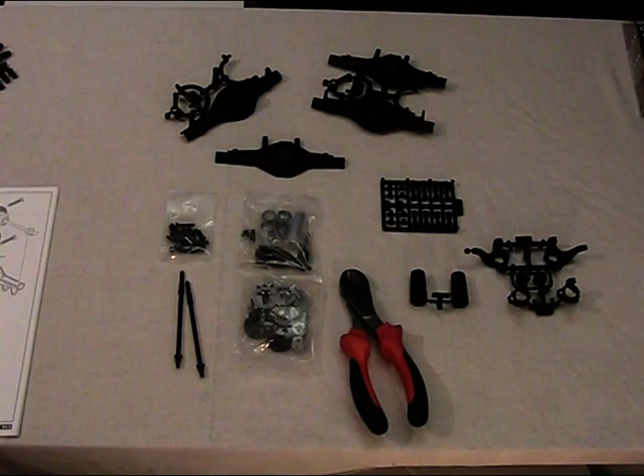Okay, I'll go ahead and remove all the parts and lay them out, and then we'll start assembling part 1. To do steps 1 and 2, I've opened all the relevant bags and put the components from each bag in a separate container.

It's a good idea not to get them mixed up, and also so you don't lose parts or they roll off your workbench. I've laid out all the components we're going to use for these two parts, and you'll see they're listed down this side of the page.

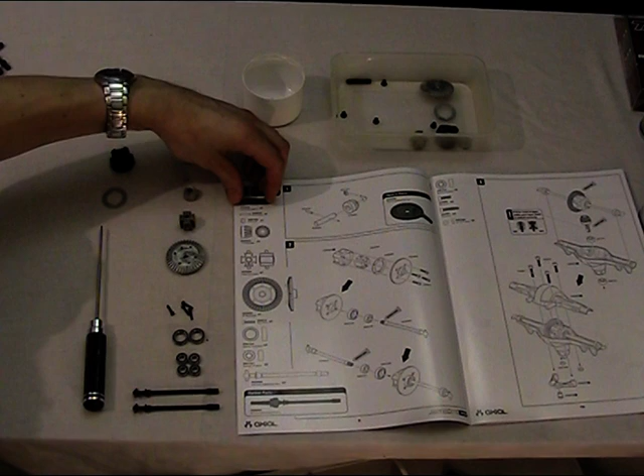The great thing with an Axial manual is that these are all to scale, so if you take the first item, it actually fits on the book. So when you come down to the screws and you've got a whole tub full like this, you can lay them on and see that they are the correct size.

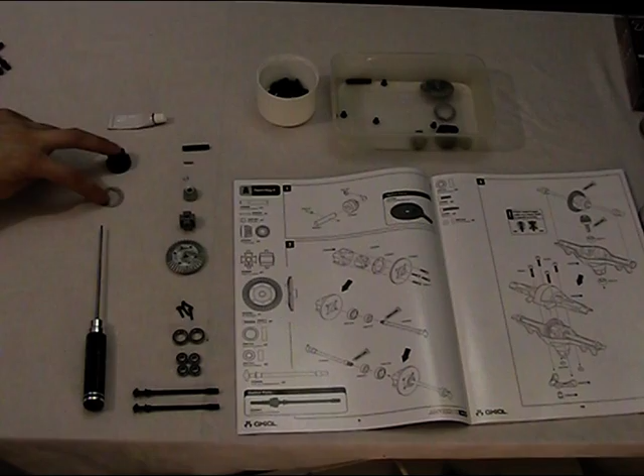That's a great help. Two parts that aren't actually marked are only shown in the pictures, and the part numbers are written on the picture, but they're not on this left hand side.

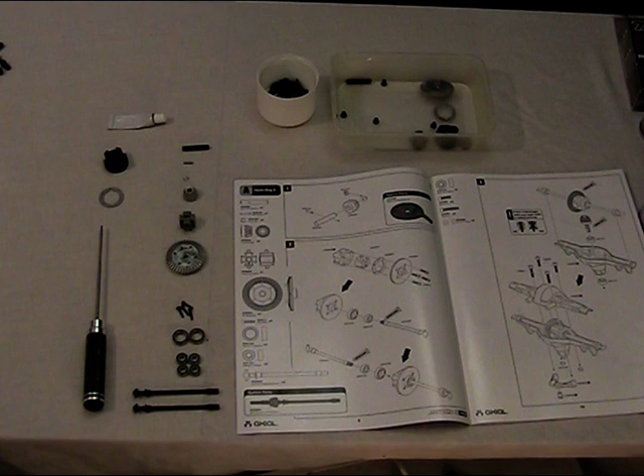Now we just need to set to and construct the parts. You can see here I've laid the 4 components as shown in the diagram. These arrows of direction show you how to assemble it and the process to go through.

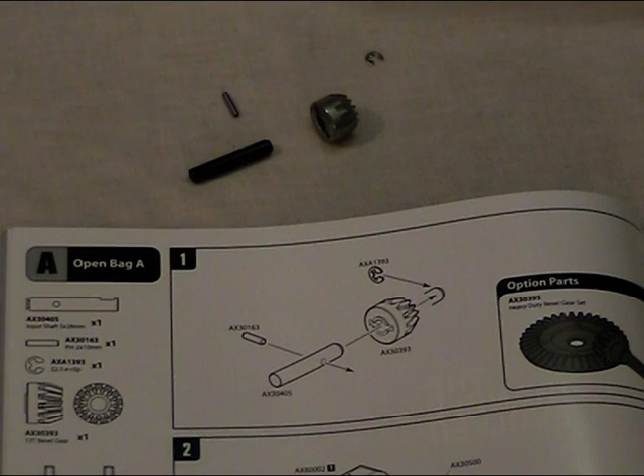You'll note that the end of this is redrawn here, so once you've put that through you'll then put the clip on, which I'll show you how to do.

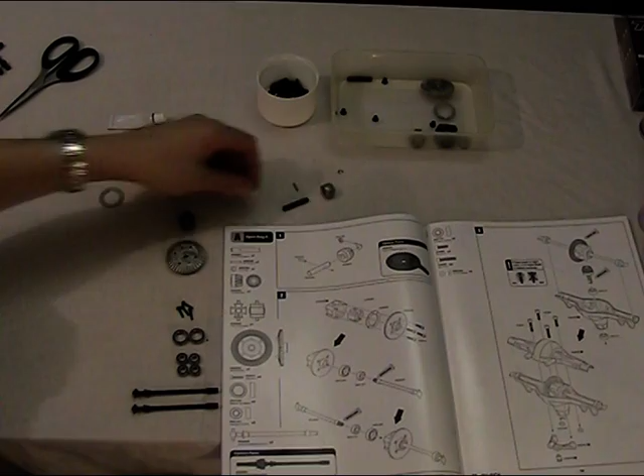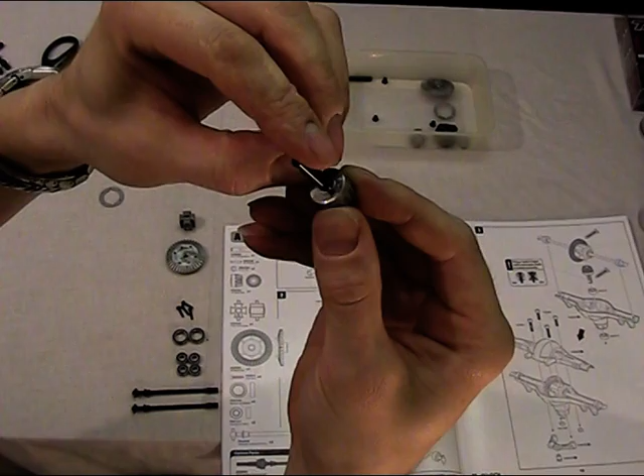So take the main shaft, push the pin through. You can then add the gear and you'll see that the pin will drop into the back, like so. And then we just need to install the clip on the front.

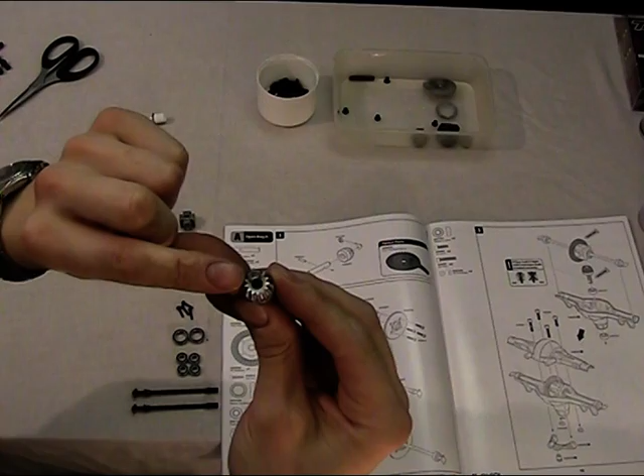These can prove to be quite fiddly, these little C-clips, so I'll try and show you as best I can. You need to get the little open section into the notches. With a pair of pliers, just going to put that clip in, like that.

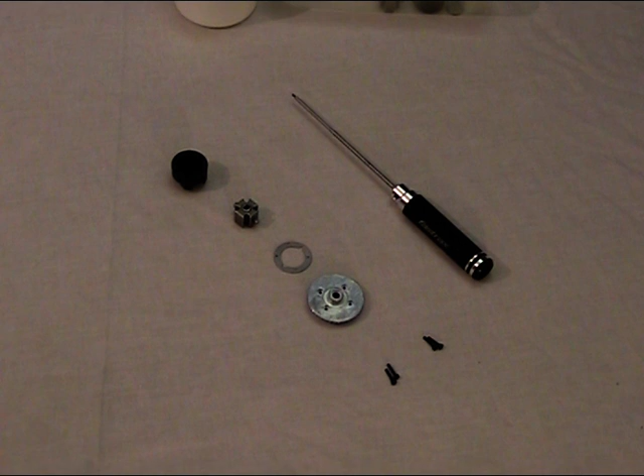You can see here I've laid out the parts that I need for step 2, the first stage, and laid them in order and got my tools ready.

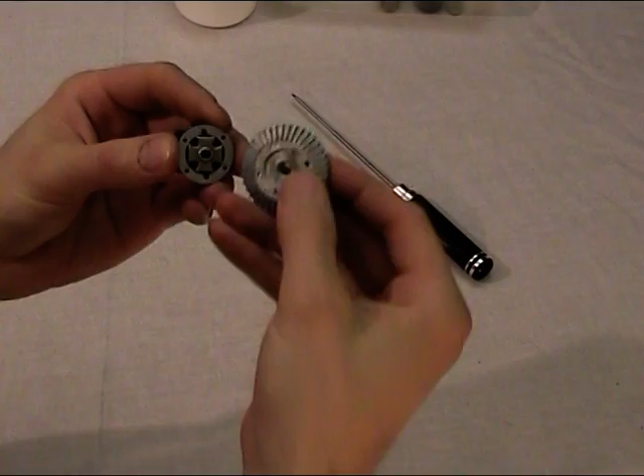So what I need to do is put the heavy duty diff locker in the plastic housing. There's then a small paper washer, just going to go on here, and if you look there's some pins on the back that fit into these holes, like so. And there's simply 4.

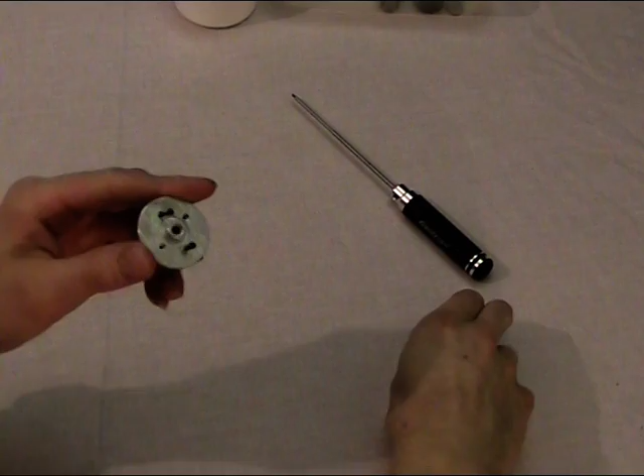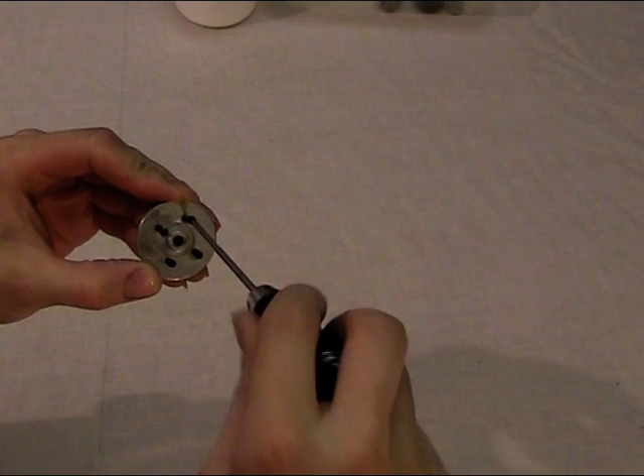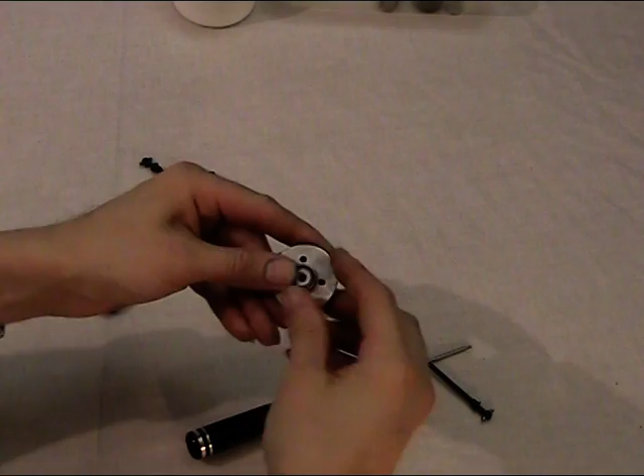I've lightly greased the ends of the dog bones that go into the locker as shown in the manual. So what I need to do now is install the large bearing on either side, and the smaller bearings actually go through the ends, and there.

That one in there. That's then going to drop inside the axle.

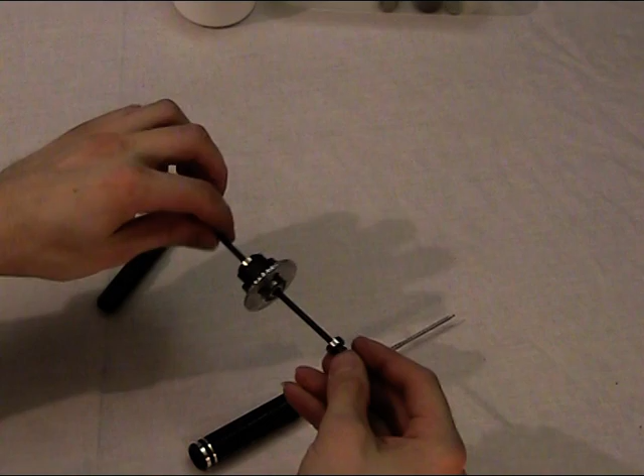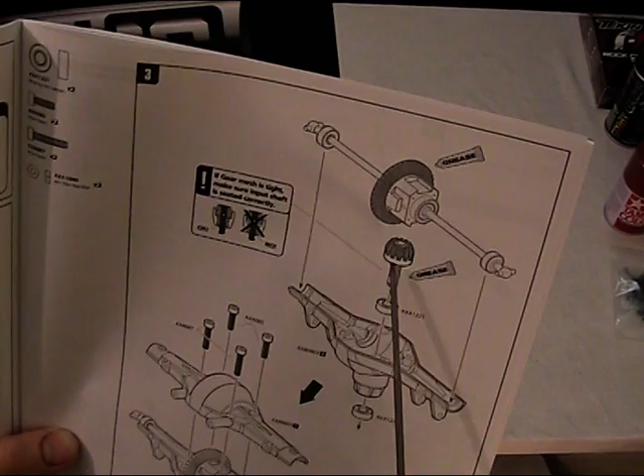Okay, step 3. There's a couple of points to note. One is a warning on the manual about making sure the input shaft is correctly seated. Also note where the grease goes - round on the gears, and also the shaft. That's very important.

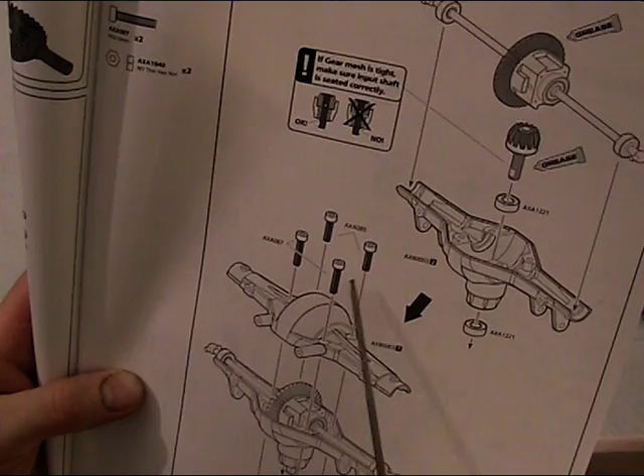With these screws, they're two different sizes, so make sure you get the short ones going through into the nut, which I've laid out here.

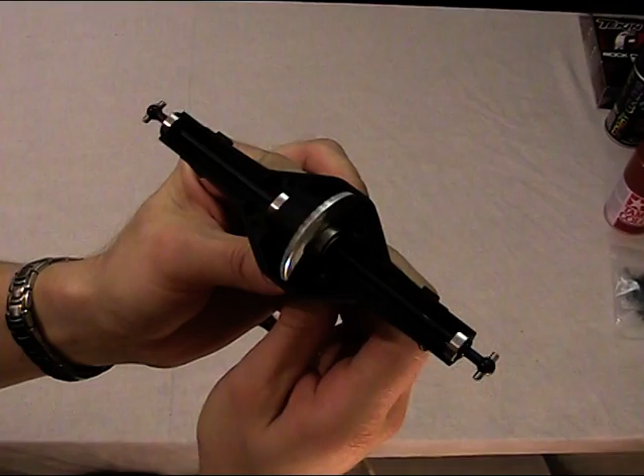I'm now happy all is running free. I go ahead, grease up the gears, and put the top of the axle on.

With a 2.5mm hex wrench, put the cover on. Drop into place the two long bolts, and the two small ones go in the back.

You'll see on the reverse there's some recesses for these nuts to drop into, meaning there's no need for a spanner while tightening them up. It's worth just nipping them up gently so they started.

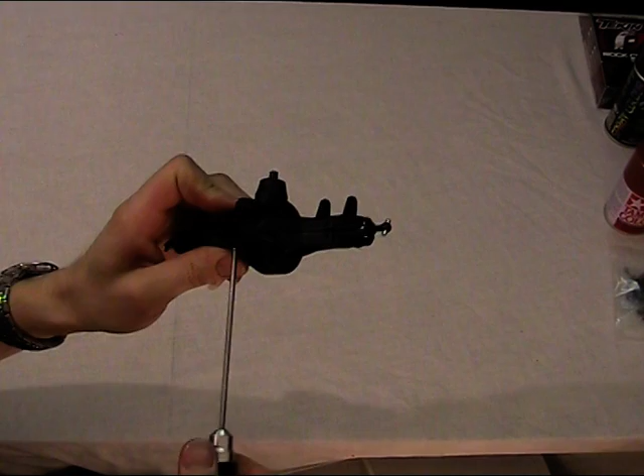Tighten those up, just be sure not to over tighten them - it's very easy to strip the plastic. Okay, move on to the next step.

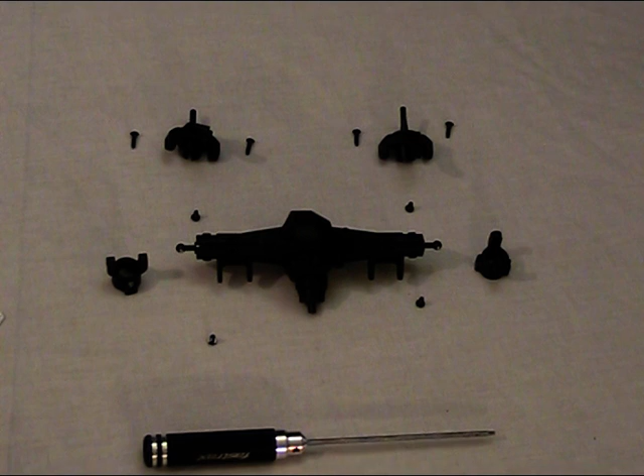Steps 4 and 5, there are some advisory notes in the manual about directions for the hubs and knuckles, so do take your time on this stage to make sure what you're putting together is what's pictured. I've laid them out here, and I'm going to do both steps together. So let's start with attaching the hub centres.

You'll need to pinch together that end to get them on, because it'll be splayed. Pop in the screws - 2mm hex this time. Tighten them up.

Just the knuckles to add now. Again, just checking the orientation of each part to make sure that you've got it correct to the manual. You'll obviously need to make sure the ends of the dog bones go in where they should.

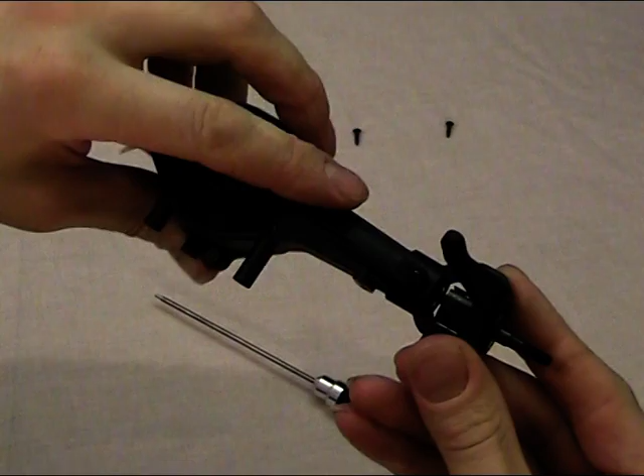Add the screws. Very important not to over tighten these, otherwise you'll limit the steering on the truck. Same for the other side.

Line up the dog bone. It's just a case of tightening those 4 screws up.

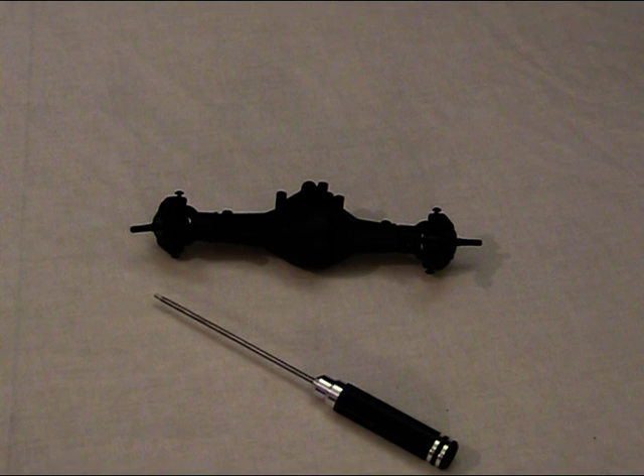Step 6 and 7, when you look at them, will feel familiar because it's really building the beveled gears, which is very similar to the start of this axle. So I'll do that and move on to just completing the rear axle. See you in a minute.

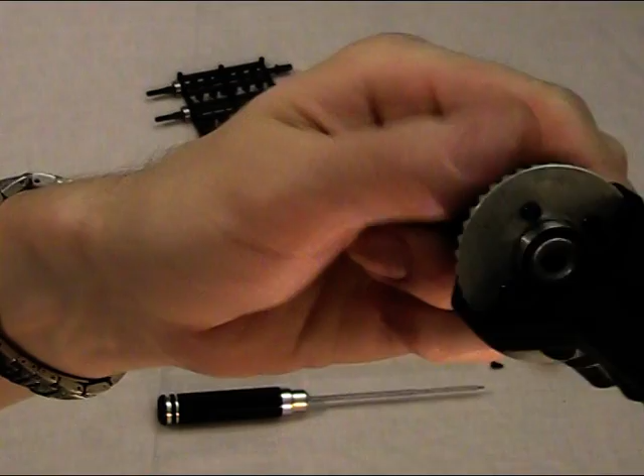Before assembling the rear axle, I wanted to point out 2 common errors. If you look on this bevel, you can see one of the nuts I've not completely tightened. When fitted into the axle, you'll find that'll foul on the plastic. So it's critical to get those tight, but you'll also notice they don't actually sit right down, so don't over tighten - it's very easy to over tighten those. So we'll just line that one in.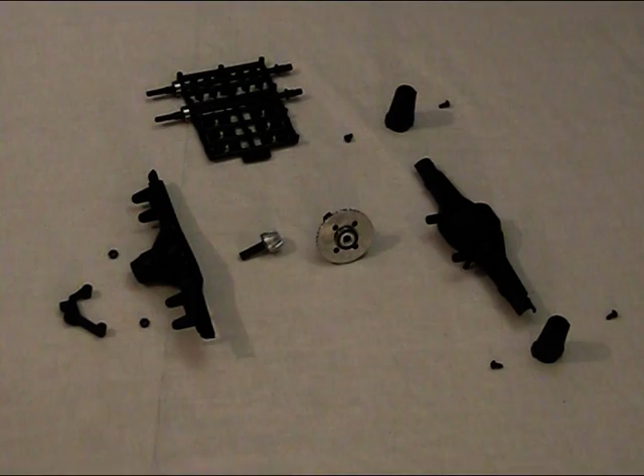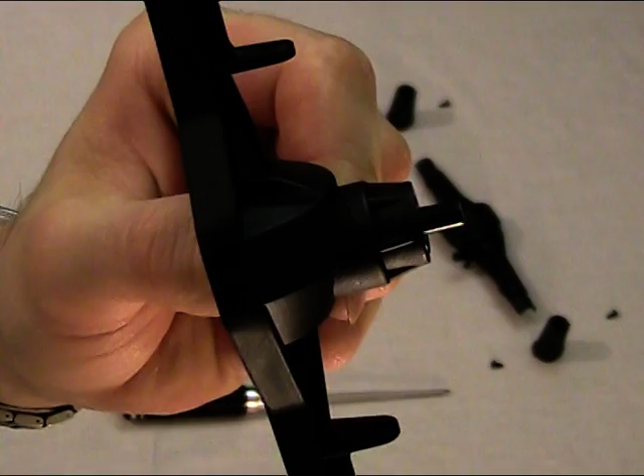Second point, just a note - switching the gear into the housing, very often that's not pushed right the way through. If you look at the gap, know if you can see that. If you don't do that, you'll find that this beveled gear will actually rub on the housing, so make sure that's pushed right in home. You may just use the back of a screwdriver to achieve that.